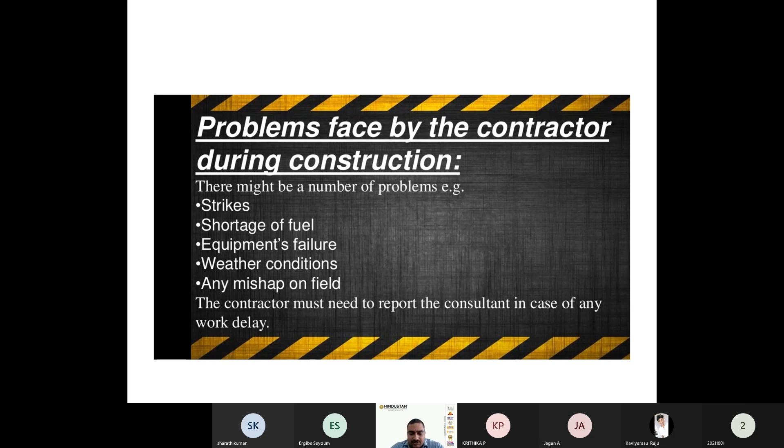So automatically they can face a shortage of fuel in the equipment, then equipment failures, then weather conditions, any mishap on the field. The contractor must report to the consultant in case of any work delay. So these are also main things in construction. These are the usual problems for the contractors.

The project inspector, meanwhile, a member of the consultant, always remains on site for quality assurance and monitoring of safety factors. Quality assurance, quality control, and environmental health and safety are also the contractor's responsibility. So the contractor's team also has a quality control department and a safety department. If you go to the Gulf countries, or in India, most companies have only the quality control department. If it is a German or French company, along with the quality control department, a quality assurance department is also there. Quality assurance fully concentrates on how you are going to assure the quality in the activities. Okay.

And EHS, environmental health and safety systems, also the environmental responsibility. Before starting any new work, the contractor is bound to have the consultant sign the check request. Without his permission, no work can be started on the field. He only signs the check request after all the test results come positive, when he is completely satisfied with the contractor's work. And one more thing, a safety department is also there in the contractor's divisions. Apart from that, you have to get signed from the client side, the client engineering divisions also.

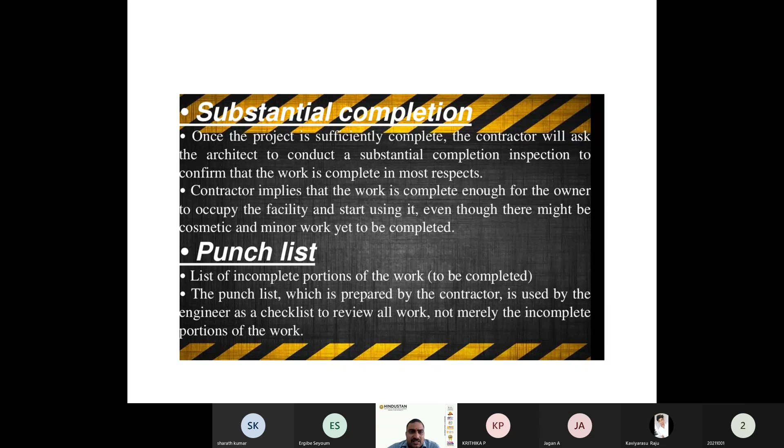Punch list of incomplete portions of the work to be completed. The punch list, which is prepared by the contractor, is used by the engineer as a checklist to review all work, not merely the incomplete portions of the work. That means the punch list is nothing but what all works have been completed, right? That is from the quality control checklist point of view, or the client can check it when the work has happened.

Suppose any legal issues arise, right, when the work has been completed, on which date the work was completed, who signed for that particular work, all these are checked through the checklist.

Post construction phase, certificate of final completion. After the contractor carries out all the corrective work identified during the substantial completion inspection and so informs the architect, the architect carries out the final inspection of the project. If the final inspection passes, certification for final payment is issued by the architect, which entitles the contractor to receive the final payment from the owner.

Record documents, as-built documents. Minor changes are often made during the construction of a project. So always, whatever records we can keep, the contractor can keep. That means some minor corrections will be there. We have already discussed the revisions. A number of revision drawings will come to the site. So those revisions have to be recorded in the ledger.

So not only those revisions have to be recorded in the ledger. Other than that, changes must be recorded for the benefit of the owner, should the owner wish to alter or expand the building in the future.

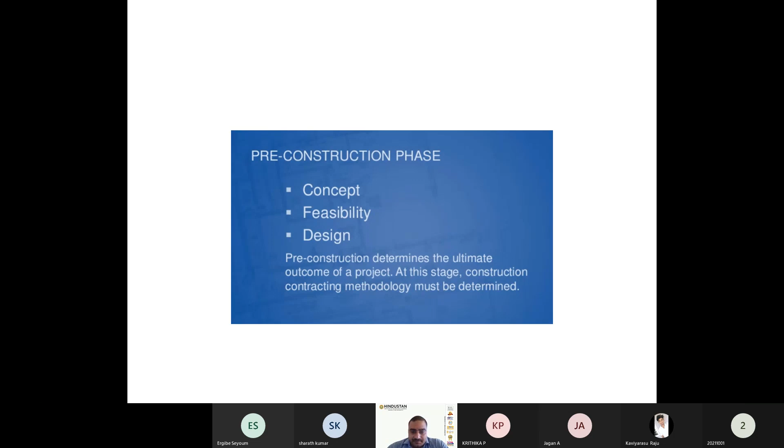In this phase, the client's responsibility is to address why the project is necessary, prepare a functional program, and determine how it will be funded. For example, if you are going to construct a multi-storied building, how many flats will be there, what is the site area, what is the built-up area, everything has to be mentioned. What is unique in the project, why the project has to be done, that has to be mentioned in the pre-construction phase.

The responsibility has been taken by the client. So prepare a functional program: how the work is going to be achieved. Hierarchy order also has to be prepared.

Hierarchy order means how many project managers, how many assistant project managers, how many project engineers, how many senior site engineers, how many site engineers, how many supervisors has to be mentioned in this pre-construction phase. Determine how it will be funded.

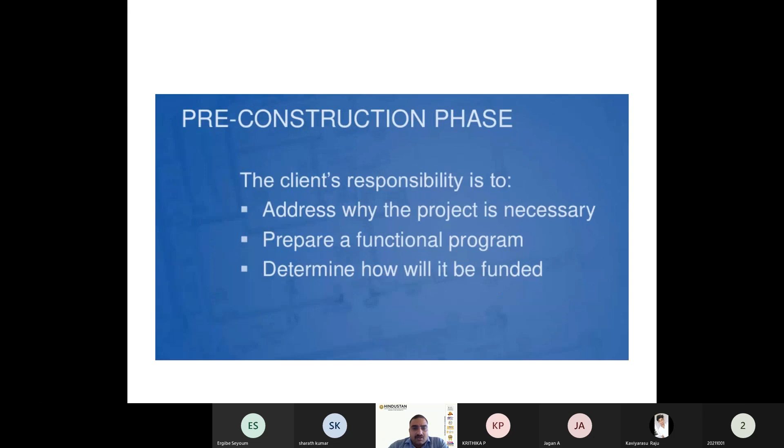At the conclusion of the pre-construction phase, the following must be confirmed: scope, cost, timing. So throughout the work, how many activities will be coming, what methodologies you are going to follow, what testing has to be followed in the quality control department, everything comes under the scope. Cost: throughout the project, how much cost it requires.

Then timing, daily timing, when it is going to start, when it is going to end. That also comes in the pre-construction phase. Not only the daily timing, but throughout the construction, throughout the project timing, when it is going to start and when it is going to end has to be confirmed.

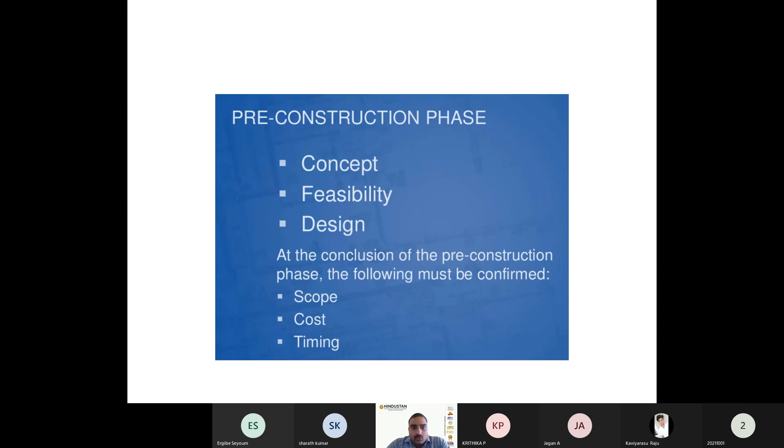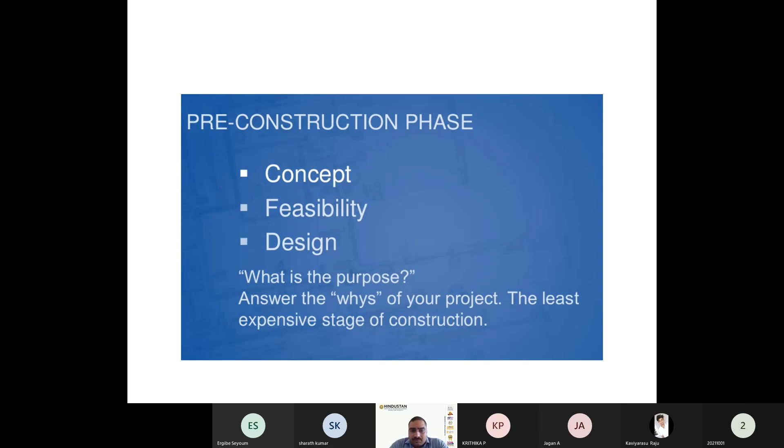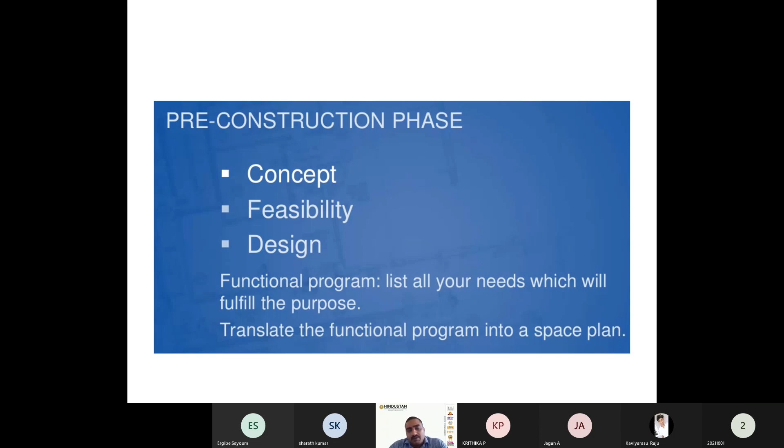So what is the purpose? Answer the whys of your project, the least expensive stage of construction. Design, functional program: list all your needs which will fulfill the purpose. Translate the functional program into a space plan. So scheduling has to be shown. Without planning and scheduling, you can't complete your project within the time.

So especially in the pre-construction phase, the major contents are concept, feasibility, design. At this point, the guidance of an architect or project manager could be helpful, as it would expedite the process by providing professional advice and technical expertise.

A technical study is conducted to determine viability, cost, options, identification of constraints, schedule. Viability, for example, which type of soil, which foundation we can go with in that construction area. The cost has to be studied. Options: which type of methodology, which type of workmanship, which type of contractors we can follow, we can find out in the technical study.

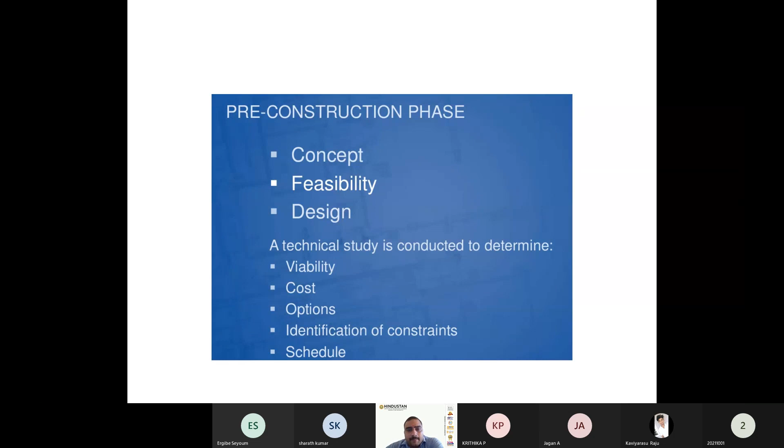Then identification of constraints. So many constraints are there. We have seen labor absenteeism, labor strikes, lack of fuel, equipment repair, weather conditions, cyclones, rains, accidents, and also schedules. Schedule is also important. This phase usually costs around 1% to 2% of the project cost.

So especially in this pre-construction stage, we are doing the preliminary estimations. We have to do some concept analysis, which concepts we are going to use to carry out the construction, which feasibility methods we are going to carry out, what design we are going to follow. So everything comes under the pre-construction stage. That is an overall idea of the project.

So we can take into account the overall idea of the project: how much cost we are going to spend, how much planning we need to focus on, everything comes under the pre-construction stage. That costs only around 1% to 2% of the project cost.

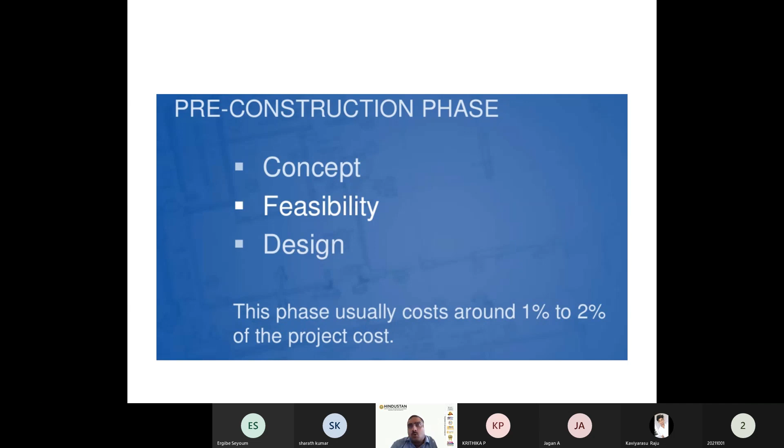So the purpose of the feasibility study: determine what needs to be done to deliver the project. What will it cost? Is fulfilling the purpose viable under the constraints? What options are available to make it viable? These things you only come to know elaborately after entering into construction.

So that is what I have told. Know the hierarchy of employment. According to the project, how many project managers; that employee detail has to be made into a chart. If you go to a big MNC company, after entering the site office, you can see those work employee charts there.

In the pre-construction phase we can fix the cost. After the work goes on, the years will go on. Instead of 1 year, the work may take 1.5 years, 2 years, or even 3 years, due to rocky soils. Instead of normal soil, if a rocky surface is there, drilling is needed.

For the drilling we need more cost. So suppose you don't put in the full cost to demolish the rocky surfaces, the work will get slow. Due to that, the cost will increase.

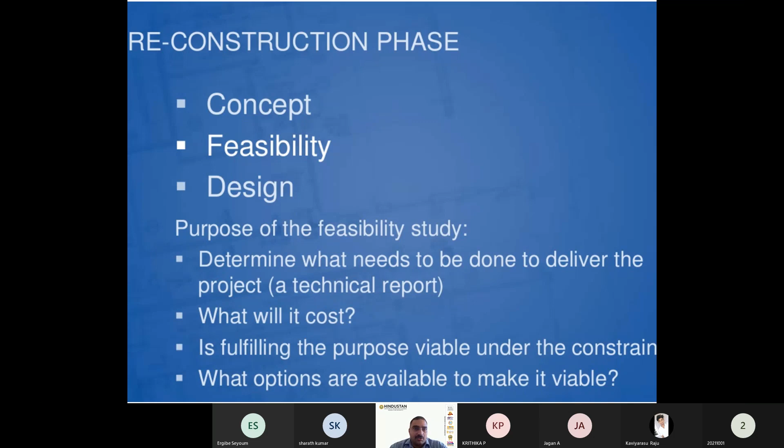Then design: schematic design, design development, construction documents. Where the project begins to take shape, now is the time to make the right decision. So in this design phase, schematic designs, design development, construction documents will be there. During this stage, monitoring of the design against the approved budget is essential. Milestone dates must be established and met. Logistics and schedule must be worked out.

So whatever design drawings result from the structural consultant as well as the architectural consultant, you have to check with the budget. For that, the planning engineers and costing engineers will be there. Especially costing engineers have to check the cost aspects according to the drawings, whether it meets the budget or exceeds the budget. So the planning engineers have to fix the milestone dates, and for that they have to think about the resource allocations.

Some days the work will not happen properly, some days the work output will not be more. So for that you have to compensate on some other days. Instead of 5 masons, you have to put 10 masons, or something has to be allocated in the resources. It may be in Primavera software, MS Project, or Excel. So what are the requirements you need? Materials, machinery, money, methodologies, and schedule have to be worked out. A qualified project or construction manager has the expertise to undertake this task.

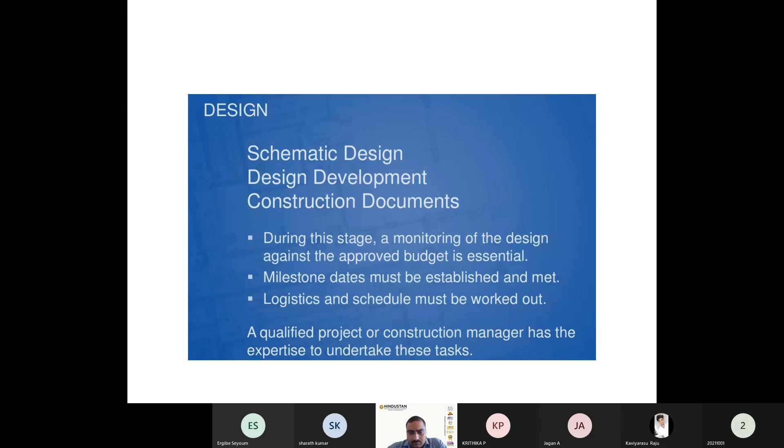And the design tendering documents are also there. Tendering documents are nothing but the contract documents. In the specifications, as we have already discussed, what type of workmanship, what mix, what type of material has to be mentioned. General specifications and detailed specifications are there. General conditions: suppose the contractor breaches the contract, what penalty they will pay also comes under the general conditions.

The drawings have to be attached in the tendering documents, showing which kind of work they are going to take over. So architectural drawings, structural drawings, shuttering drawings have to be attached in the tender documents. Instructions to bidders: security deposit and earnest money deposit are mentioned in the instructions to bidders. When the work is going to start and end is also mentioned. Then addenda are also attached in the tendering documents.

In tendering, design-bid-build: the work is tendered to general contractors. Construction management plays a vital role in this tendering area. The construction manager tenders the work on behalf of the client to qualified trade contractors. Instead of construction managers, if you go to the government sector, chief engineers tender the work on behalf of the government.

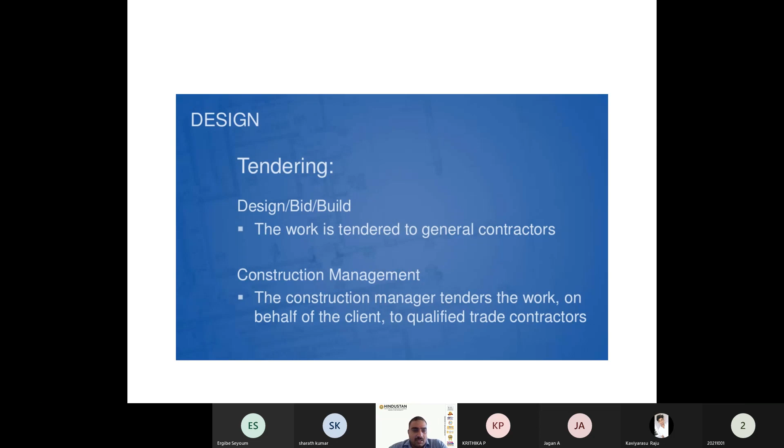So during the construction phase, focus on material procurement; labor resources are secondary. First one is the pre-construction phase, second one is the construction phase. So in the construction phase, especially you have to focus on the material procurement.

Material procurement is nothing but what are the materials you need for the construction, that has to be arrived by the store department, and that store department has to give the requirement to the purchase department. The store department gets the requirement from the particular engineers and project engineers. The purchase department also cross-checks with the engineering divisions whether you need this much material, and verifies with the corresponding engineers before raising the purchase.

Purchase raisement has to be made by the purchase department for the materials ordered. Whether the vendor is able to send the materials as early as possible has to be checked by the purchase department. When receiving quotations from vendors, the purchase department's work starts. Which vendor gives less amount has to be checked, along with the vendor's previous records, also checked by the purchase department. According to that, vendors are chosen to supply materials to the construction. That is also a general thing.

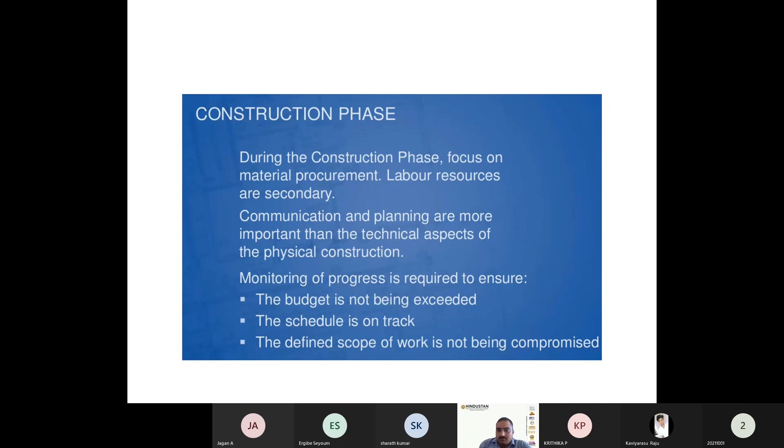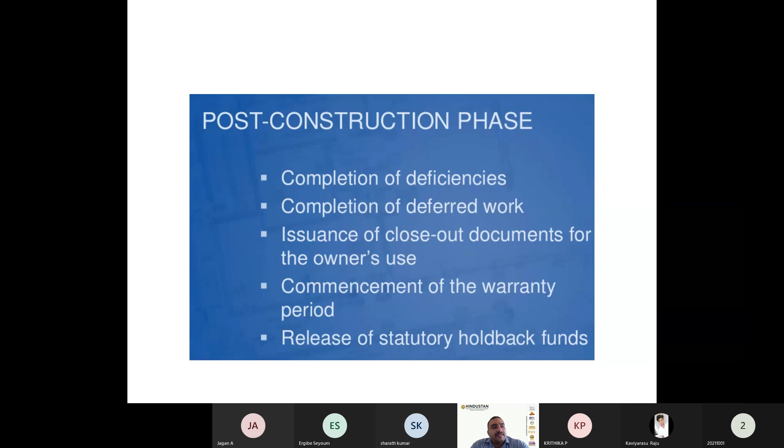Post construction phase. After completing the construction, whatever deficiencies there are, the contractor company has to complete them. Suppose in some areas cracks will be there, some patching work will be there, that has to be considered by the contracting company. This includes completion of deferred work, issuance of close out documents for the owner's use, commencement of the warranty period, and release of statutory holdback funds.